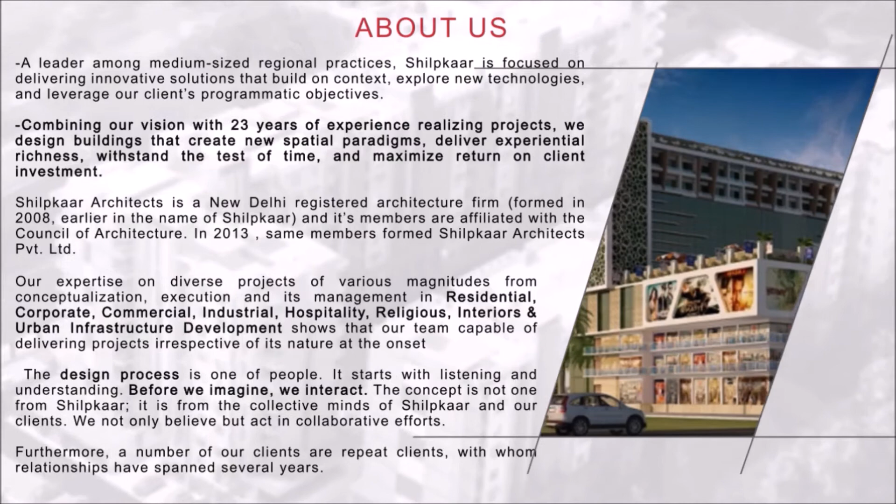Shilpkaar Architects Pvt for sustainable and green architecture. We have been working in a highly progressive graph for the last 23 years and leading among medium-sized regional practices in pan-India and overseas. We focus on delivering innovative solutions with new technologies without compromising the client's needs and comfort.

Shilpkaar was formed in 2008, and since then we have been designing buildings that create spatial paradigms and deliver experiential richness to withstand the test of time.

The 23 years of hard work and meticulous efforts of our principal directors, Architect Vivek Jindal and Architect Shailendra Sengar, who are also fellow members of the Indian Institute of Architects, Institution of Valuers, and Associate Life Member of the Institute of Indian Interior Designs, form the solid foundation of Shilpkaar.

Our directors, Architect Biswajit Sen Gupta, the mastermind behind Asia's largest senior citizen housing complex in Bhiwadi; Engineer N.K. Mittal, the expert in MEP services; and Architect Akhil Gupta, the youngest director with remarkable zest, innovative ideas and new working schemes. Shilpkaar is the in-house resort for all architectural and MEP services.

All our associates are from IITs, NITs and other reputed government colleges.

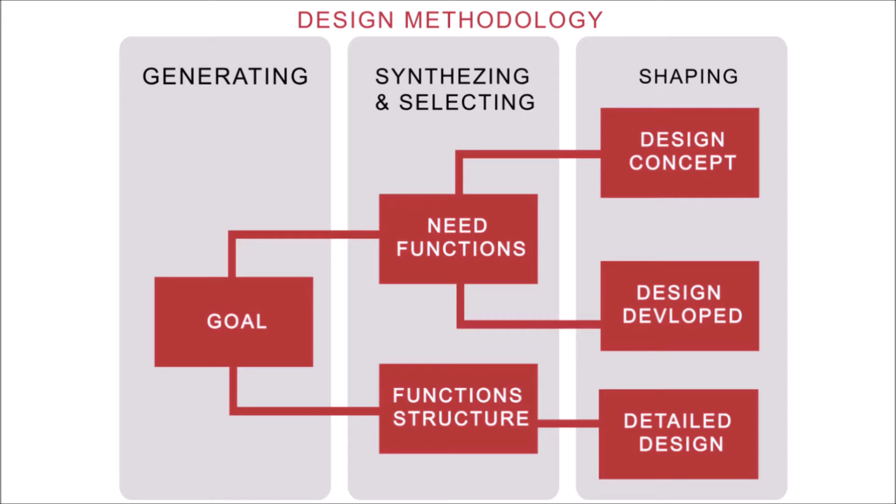Our expertise on diverse projects of various magnitudes shows that our team is capable of delivering projects irrespective of its nature at the onset. We follow the design methodology of generating the goal, synthesizing and selecting need, functions and structure, and then shaping the design concept which on further development leads to the detailed design.

The hardworking, enthusiastic and talented constitute our core team, which includes urban planners, senior architects, interior designers, junior architects, CAD detailers and draftsmen, 3D animation creators, civil engineers, valuers, model makers, and support staff. They all work as the backbone of Shilpkaar.

Now we are highlighting some of our projects.

Hitech Gears Limited, ENTC Nova plant in Bhiwadi, Rajasthan. The built-up area in RCC is 2000 square meters and in shed is 10,000 square meters. The project was completed in January 2012. Further details about this project will be described at the end.

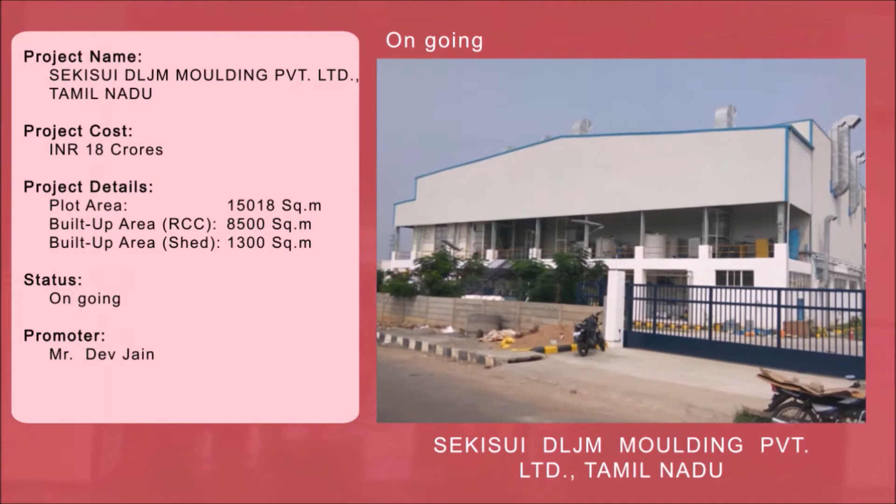Another completed project is Sekisui DLJM Moulding Pvt Limited in Khushkhera, Rajasthan, with built-up area in RCC 680 square meters and in shed 4300 square meters. Sekisui DLJM Moulding Pvt Limited in Tamil Nadu with built-up area in RCC 8500 square meters and built-up area in shed 1300 square meters. Sunbeam Auto Pvt Limited, Rico Industrial Area, Kaharani, Alwar, Rajasthan.

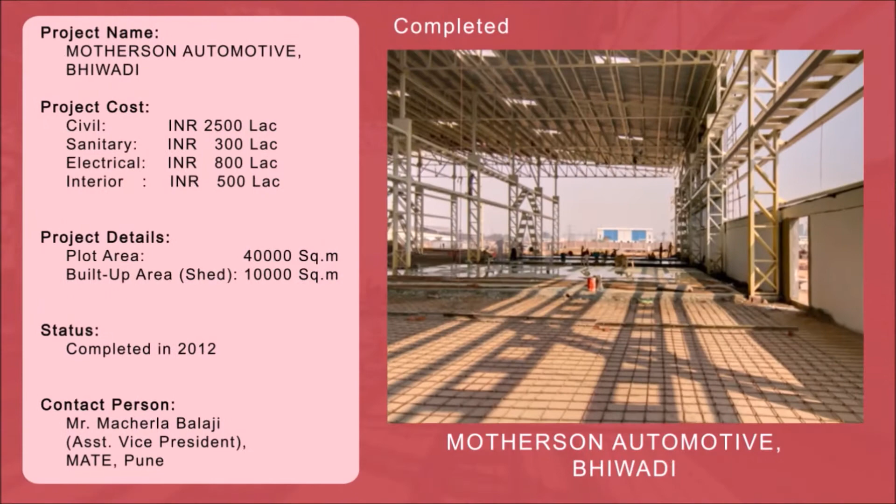The built-up area in shed is 15,000 square meters. Another completed project, Motherson Automotive in Bhiwadi with built-up area in shed 10,000 square meters. Ramakrishna Forgings Limited in Jharkhand with built-up area in RCC 10,000 square meters and built-up area in shed 70,000 square meters.

Another completed project, Paracoat Asia Corporation Limited in Thailand, with built-up area in shed 970 square meters, completed in 2012. AV Light Automotives Pvt Limited in Chennai with built-up area in RCC 250 square meters and built-up area in shed 1650 square meters.

Another completed project, FIEM Auto Industries Limited in Bhiwadi with built-up area in RCC 5800 square meters and built-up area in shed 4600 square meters.

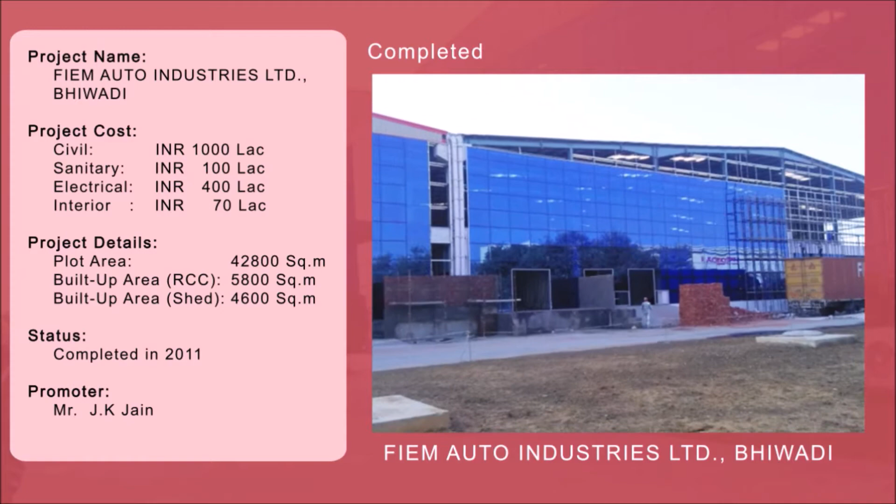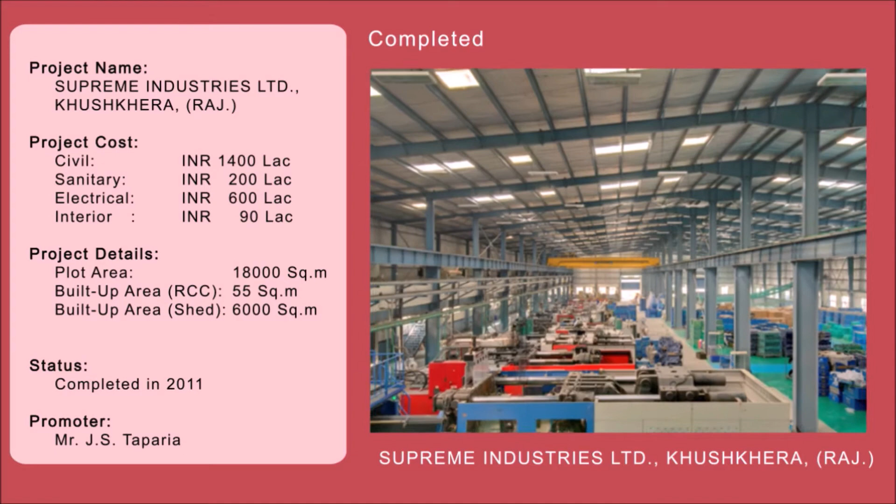The recently completed project, Yazaki India Pvt Limited in Bhiwadi with built-up area in RCC 3000 square meters and in shed 12,000 square meters. Supreme Industries Limited, Khushkhera in Rajasthan with built-up area in RCC 55 square meters and built-up area in shed 6,000 square meters.

KE Industries Limited, Unit 4 in Bhiwadi with built-up area in RCC 15,000 square meters and built-up area in shed 9,000 square meters. The project was completed in 2008.

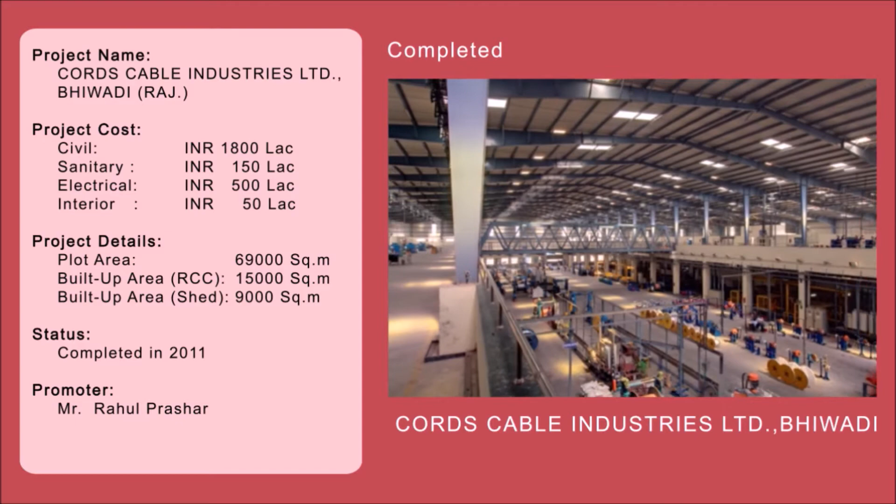Cords Cable Industries Limited in Bhiwadi, Rajasthan with built-up area in RCC 15,000 square meters and built-up area in shed 9,000 square meters.

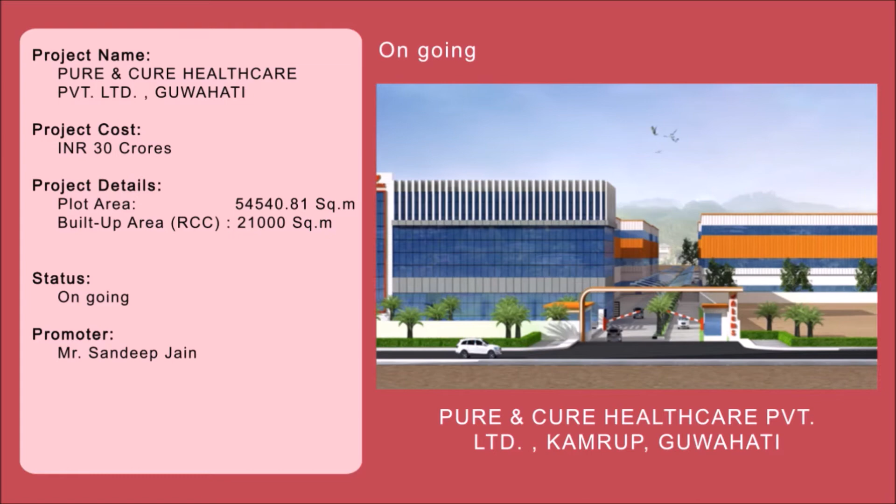Very recently completed project, Micromax Tapukara, Alwar, with built-up area in RCC 4,700 square meters and built-up area in shed 8,850 square meters. Now moving forward towards our housing and condominiums projects.

Krish Vatika in Bhiwadi, Rajasthan with built-up area 51,200 square meters, which was completed in 2013.

Nimrana Estate, Village Chabara, Shahjahanpur, Behror, Alwar, with built-up area in RCC of 32,875 square meters, and this project is still going on.

Shankara Residency at Umek City, Jaipur with built-up area in RCC of 74,410 square meters, is going on.

Now our corporate offices and commercial buildings. City Centre in Rohtak, Haryana with built-up area in RCC of 3,450 square meters.

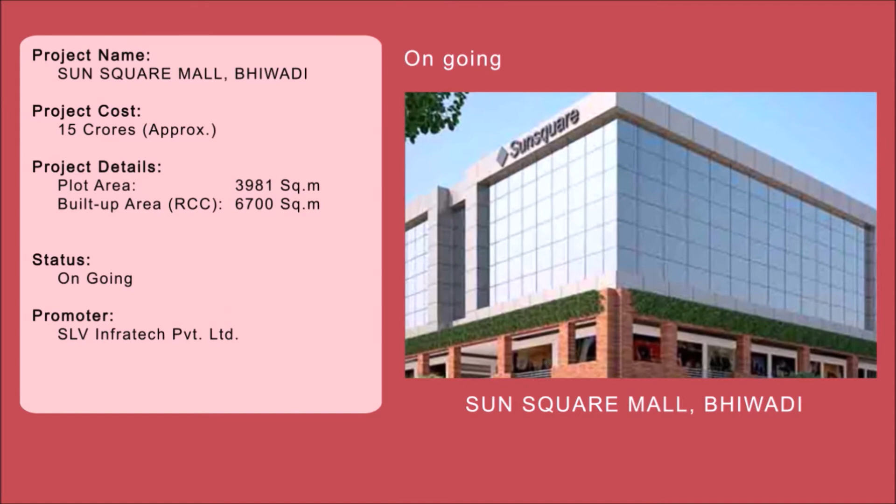Sukham Tower in Bhiwadi with built-up area in RCC of 12,055 square meters. Sun Square Mall in Bhiwadi with built-up area in RCC of 6,700 square meters, is still going on.

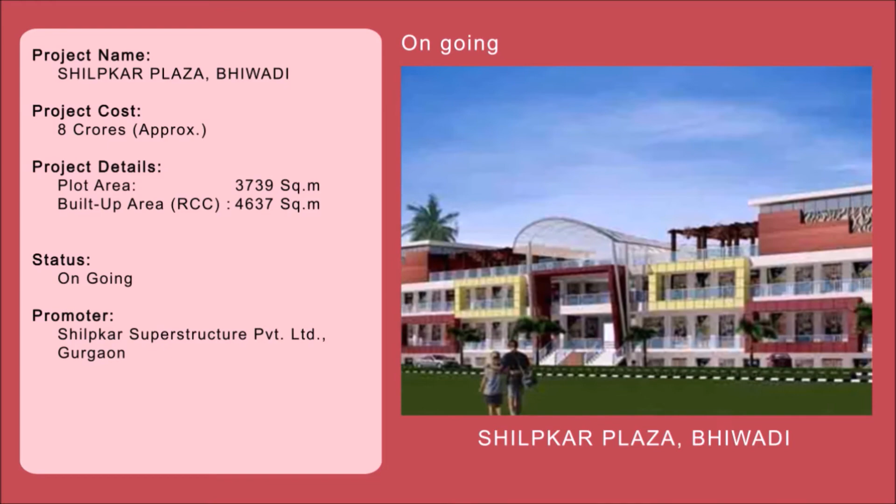Another ongoing project, Shilpkar Plaza in Bhiwadi with built-up area in RCC of 4,637 square meters. Krish Square in Bhiwadi with built-up area in RCC of 6,500 square meters.

Hitech Gears Limited is an auto component manufacturer of world-class repute. It is situated in Bhiwadi, Rajasthan. The project has received a gold rating under the Green Factory Rating System administered by the Indian Green Building Council.

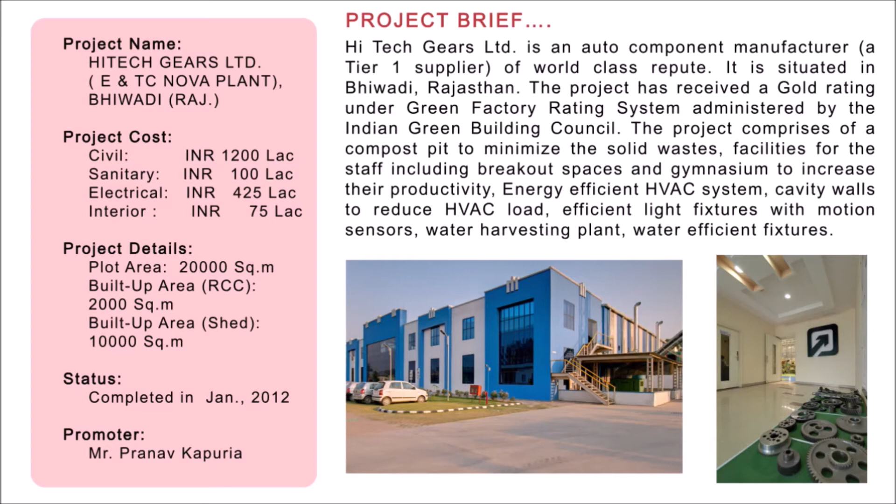The project comprises a compost pit to minimize solid waste, facilities for staff including breakout spaces, and a gymnasium to increase their productivity.

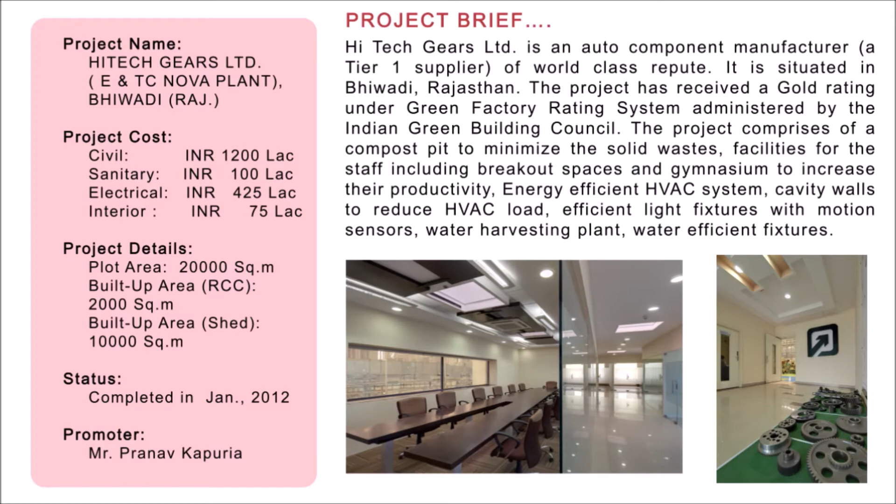Energy efficient HVAC system, cavity walls to reduce HVAC load, efficient light fixtures with motion sensors, water harvesting plant, and water efficient fixtures. The project built-up area for RCC was 2,000 square meters and for shed was 10,000 square meters.

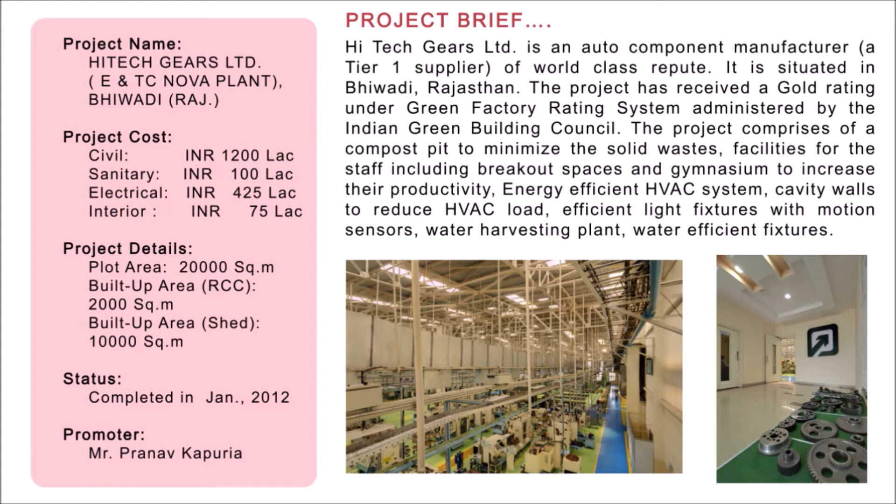The project was completed in January 2012. The project highlights are Vastu compliant design, design for energy conservation, and certification as gold awarded by the IGBC Green Factory Building Rating System.

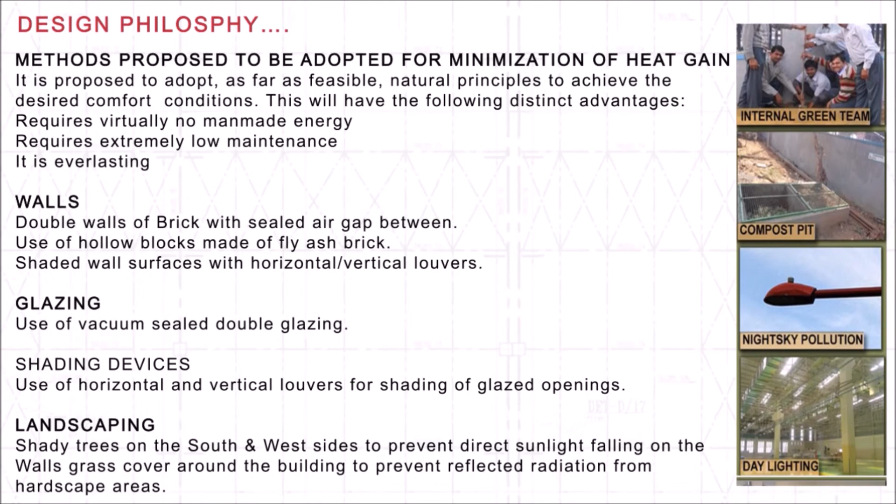Design philosophy: methods proposed to be adopted for minimization of heat gain. It is proposed to adopt, as far as feasible, natural principles to achieve the desired comfort conditions. This will have the following distinct advantages.

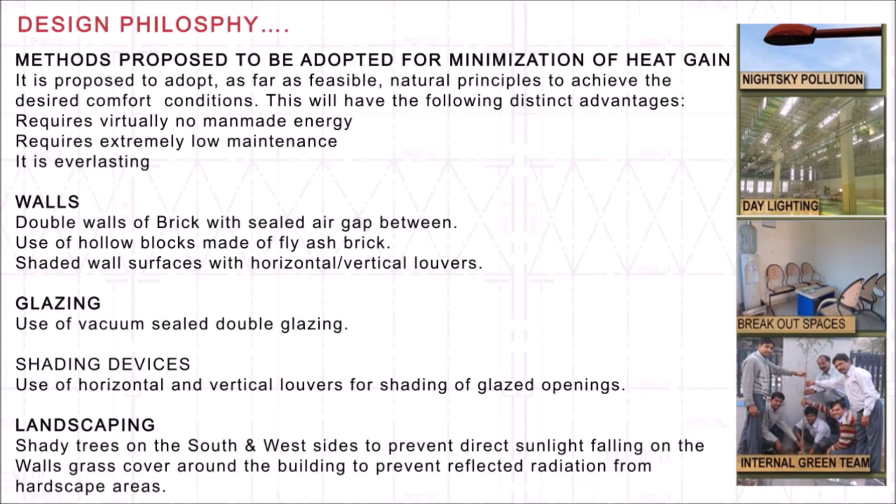Requires virtually no man-made energy, requires extremely low maintenance, and is everlasting. Walls: double walls of brick with sealed air gap between, use of hollow blocks made of fly ash brick, shaded wall surfaces with horizontal or vertical louvers.

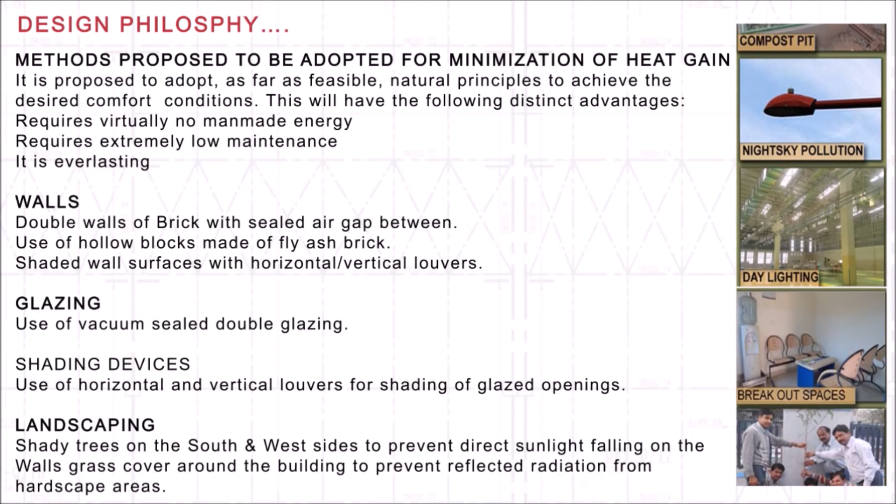Glazing: use of vacuum sealed double glazing. Shading devices: use of horizontal and vertical louvers for shading of glazed openings.

Landscaping: shady trees on the south and west sides to prevent direct sunlight falling on the walls, grass cover around the building to prevent reflected radiation from the hardscaped areas.

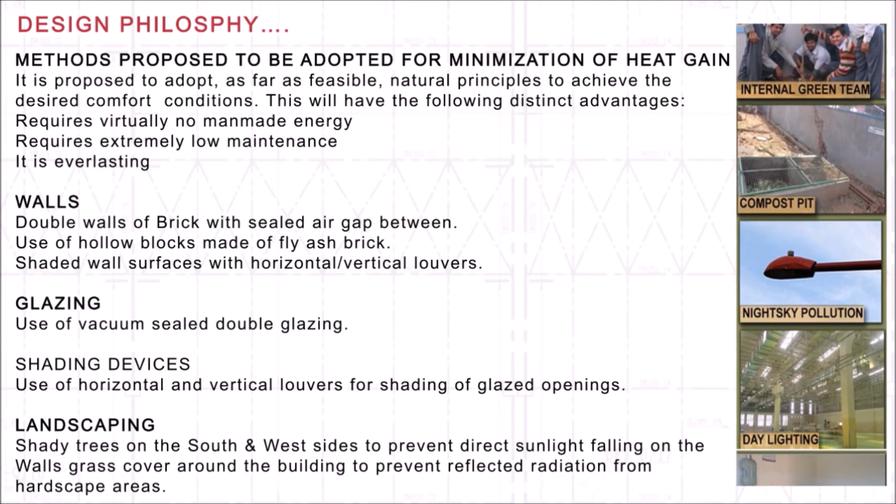Paint: on external surfaces, use of light colored reflective paint to prevent heat absorption of walls. Roof: use of heat insulating finishing on RC terrace slab with mud phuska or lime terracing.

Selection of roof profile to minimize exposed area, thereby reducing heat gain. Use of roof extractors for dissipating heat from inside the work area.

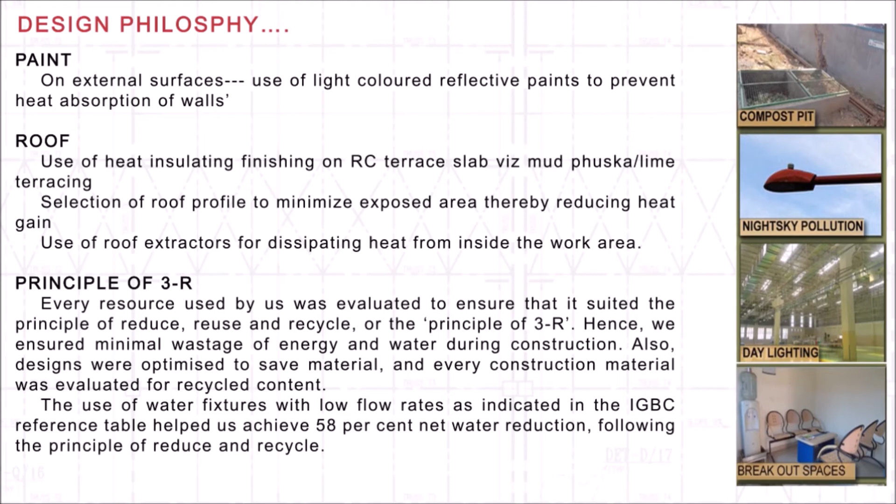Principle of 3R: every resource used by us was evaluated to ensure that it suited the principle of reduce, reuse and recycle, or the principle of 3R. Hence, we ensured minimal wastage of energy and water during construction.

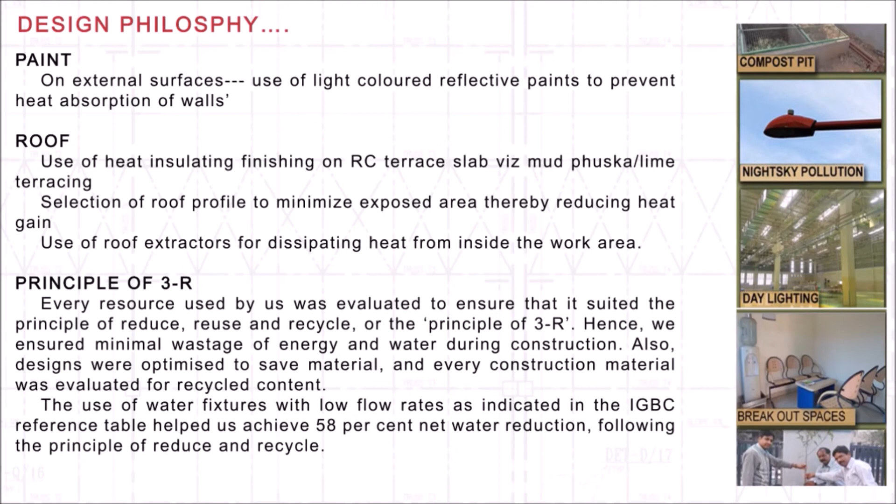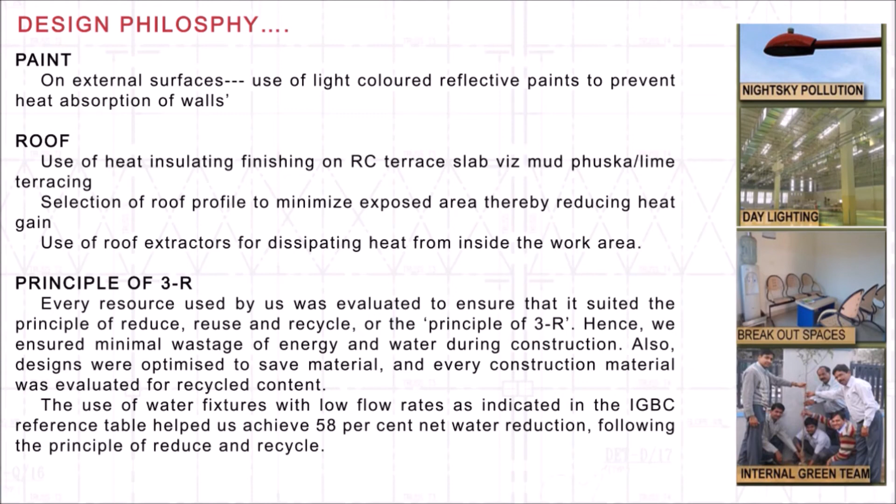Also, designs were optimized to save material and every construction material was evaluated for recycled content. The use of water fixtures with low flow rates, as indicated in the IGBC reference table, helped us achieve 58% net water reduction, following the principle of reduce and recycle.